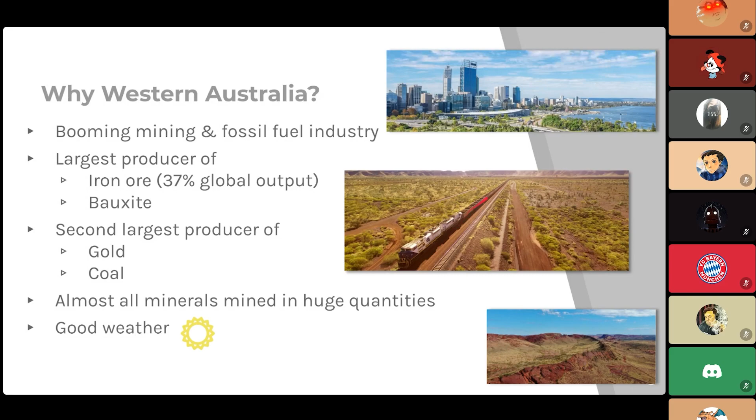So there's a lot of jobs in mining, and also a lot of jobs in the industries that support the mining industry. Here's a picture of a train - this is an iron ore train. It's kind of hard to see, but that train goes all the way off into the distance. Just to give you an idea of how much iron ore is exported, there'll be hundreds of these trains leaving Australia every single day.

So when I got there, I started looking for a job and got really lucky. Within 3 days, I got a job with a company called Falk. They make gearboxes and gears in general. They're probably the biggest gear company in the United States and one of the biggest in the world. They've lost a lot of market share in recent years, but they're still a pretty big player.

Especially in the post-war years, they were hugely influential in gear design. A lot of the gear standards people use globally were written by these guys, so they were pretty influential. In Perth, they had an absolutely tiny office - I was one of 4 people and one of 2 engineers who worked there. I was working as internal sales, and I'll talk about what internal sales is in a little bit. It's a job that's really common for engineers to go into, but it's not very well known.

This here is probably their bread and butter - their standard catalog product, just a gearbox. I'll go into more detail about what these are used for, but to give an idea of size, this one here is probably about 1.8 meters tall. They also do ring gears like this, which can obviously be really big, and this was a big part of their business for a long time.

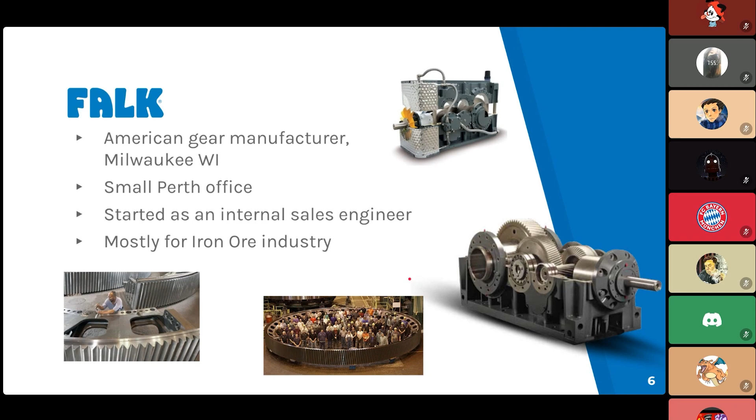So internal sales is a super common job for new grads. In my opinion it's a pretty good one, but it's not very glamorous. Essentially, a customer will come to your company and say, I need a machine that can do X, Y, and Z. An internal salesperson will look through the catalog, find the right product or maybe modify an existing one, then price it up and give the customer a quote. Frequently these internal salespeople are engineers, because you need to do a lot of calculations - some customers have specific specifications that they need you to comply to.

Some applications can be quite weird and unusual, and you need to do some background work to make it work before you can actually hand it off to the design team. So internal sales forms the link between the customer and the engineering design team. The internal sales guy will write the design brief that the design team will use to design the products.

It can be exceptionally technical. You can be doing a lot of math and a lot of hard design in SolidWorks, or it can be incredibly basic, just looking up catalogs and choosing products straight out of there. It kind of depends on the company.

After I did this for Falk, for personal reasons, I had to go back to Ireland, and I got a job with a company here called Prodieco. Ireland's a small country, and for mechanical engineers there's really only two industries: pharmaceuticals and semiconductors. The pharmaceutical industry is absolutely enormous - I can't remember the exact percentage, but I think it's like 30% of Ireland's economy. So if you're a mechanical engineer, you're probably going to work in pharmaceuticals.

This company, they are a tool maker. I'll explain what that is in a bit more detail. A lot of people don't even know that this exists as an industry, but it's super, super important, and there's a lot of job opportunities with tool makers.

This company was kind of small to medium - I think there's maybe about 100, 120 employees, about 30 to 40 engineers. I'm not sure that's exactly right, but it's roughly right. They specialized in tooling for manufacturing blister packs, which are these things here. We've all seen them, you've probably never thought about how they're made, but I spent a huge amount of time thinking about how they're made.

It's an incredibly specific niche, but there's a lot of these little tiny niche companies out there that do kinds of things that you don't expect.

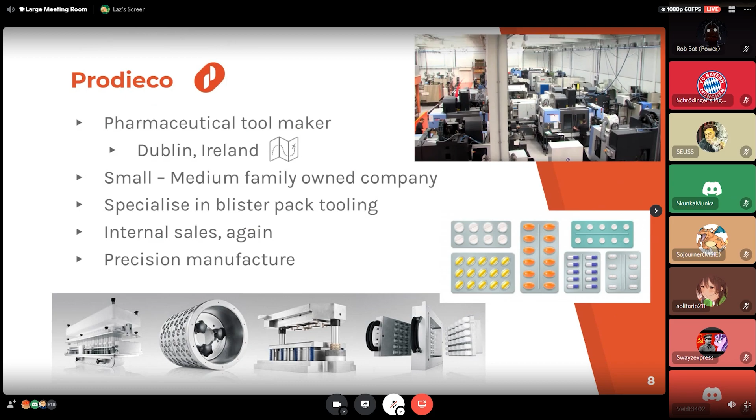I started off there in internal sales again, but as I was in this role, I moved away from sales and more into design, specifically into machine audits and tooling design.

These are the products that they make down at the bottom here. They just kind of look like random machinery components, but these are incredibly precise machines. Any tools need to be made with an absolutely absurd level of precision, which made this pretty challenging and kind of fun job. I quite liked it a lot.

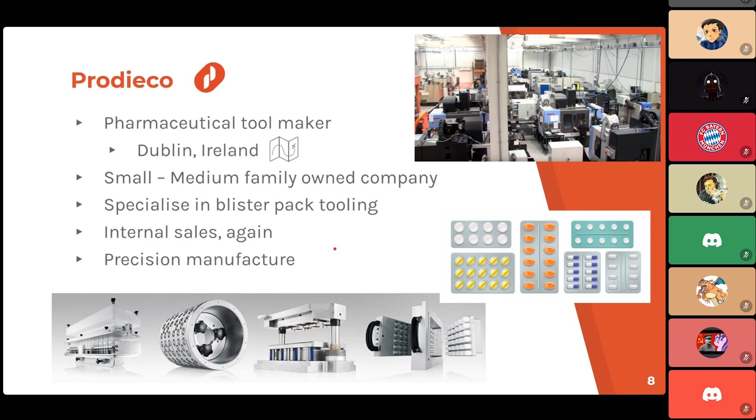So I'll talk about what a tool is and what a tool maker does. When you buy a machine that manufactures something - say something that manufactures glass bottles - the machine itself is capable of doing a lot of different types of glass bottles. If you look at videos of how they're made, and assembly lines in general, you'll see that the machines are making a specific part, but the machine doesn't have to make a specific part. It can make almost anything within that type of product.

The way that you change it to make different things is through the use of tools, and these are examples of tools down here. This one here is just a picture I got off the internet - it just picks up an item and moves it onto another thing. You see it has some little jaws here that grab it, and it picks it up, and it's only able to pick up that one thing.

That's all it can do, it can't do anything else. So they have to be made bespoke for every product that you do. Each tool that you make is custom to that product.

This here is a blister pack machine, a German machine that actually packages pills into blister packs. Inside is a whole bunch of tools that make specific things. In this video, you can see this tool punches out the blister packs from the web, and it's specific to that size of card. It's only able to do that one thing.

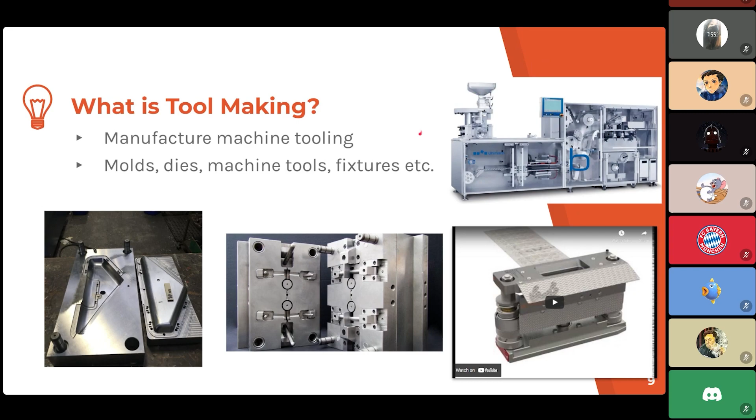This tool here is not that big, maybe 20 to 30 centimeters long, but it would cost about 6,000 to 7,000 euro easily. Then you'd have a whole set of tools all the way down this machine, and a tooling change out could cost anywhere between 20 to 120,000 euro easily.

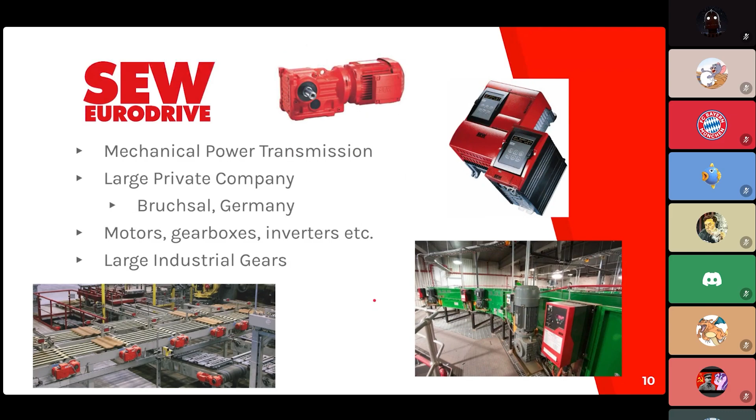My role at SEW is design and support. I'm kind of apart from the design team—there's a core design team in Australia of about 6 to 8 engineers. I sit apart from them and do calculations pretty much all day. I took screen grabs of what my screen looks like on any given day, so you can see what it's like working in design. You've always got Outlook open because emails just don't stop. I've got gear design software, some spreadsheets I made, other random spreadsheets that every engineer makes—you end up with hundreds of these little tiny spreadsheets lying around—and some proprietary software.

This here is a design I was involved with—an apron feeder drive, a type of conveyor, a really big one. This one was 600 kilowatts, which is a lot if you don't know about power ratings. To give an idea of size, from here to here is about the same height as me, about 1.75 meters. The whole thing weighs 16 tons, and with the motor, which isn't there, the whole thing weighs about 25 tons.

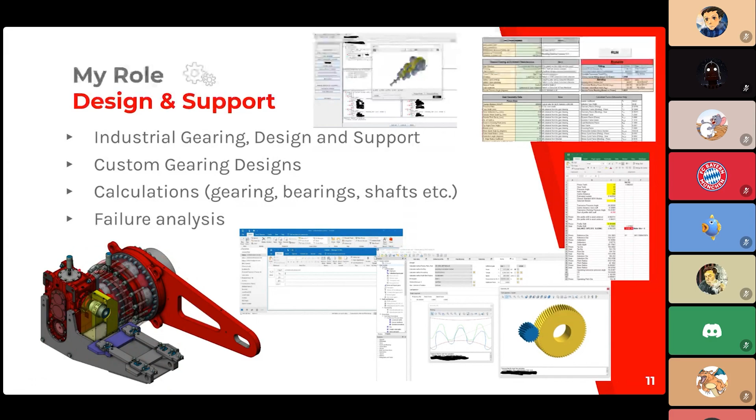So I'll talk a little bit about the industries that we serve. Iron ore is probably our biggest single industry. I don't want to put a percentage on it, but I'd say almost around half of the work that I do involves iron ore.

It's mostly done in this part of Australia, which is super remote. It's about a 2,000 or 3,000 kilometer drive to the nearest city. It's really in the middle of nowhere, and it just looks like this. It's just raw iron everywhere. That's why the dirt is red, because there's so much iron in the soil. There's so much iron in these rocks that they'll actually take a weld. You can weld a signpost directly to a rock in this region.

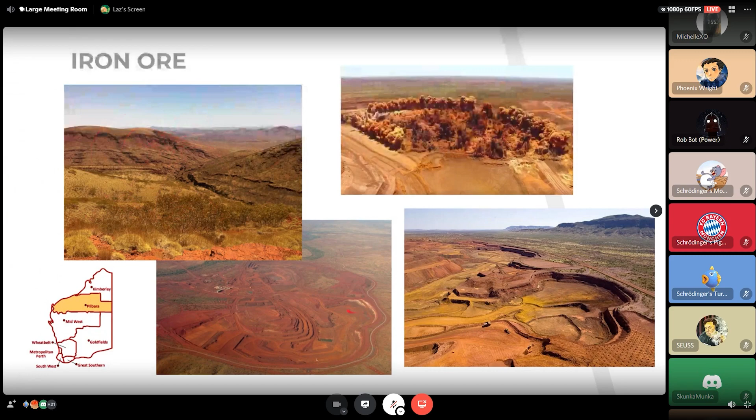This is what iron mines look like from the sky. They just strip mine them out. They don't do any underground mining or anything, they just strip the land bare. This here is a blast. I think this was the biggest blast they did in the last 2 years. That was 11 megatons, so 11 million tons of material blasted out in one go.

So conveyors are probably our bread and butter. This is what I work on probably the most out of anything. Basically they just move material from the pit, where the material comes from, to the train stations, to where it needs to go. They can be really, really long. You can see this one just goes all the way off into the distance, and they can be pretty big. These are ones here that I worked on.

You can see here, this is the gearbox, and this is a 1.25 megawatt, 6,600 volt motor. And mine sites have a lot of conveyors. You can see here, all these, these are just messes of conveyors, just moving materials around.

And they move an almost unbelievable quantity of materials. It's not unusual for a belt to move about 10,000 tons every hour. Iron ore is worth about $200 a ton, so you do the math on that - it's $2 million every hour on every conveyor. It's a lot. The power they use is crazy too. This conveyor here has a total 7.5 megawatt install. To put that into perspective, that's about enough power to supply around 9,000 Australian homes. And that's just the conveyors, let alone the rocks, the crushers, and the other equipment they have.

This was a conveyor drive that I did in Papua New Guinea. This is at a gold mine, which is just in the middle of the jungle. And this was also a pretty big one.

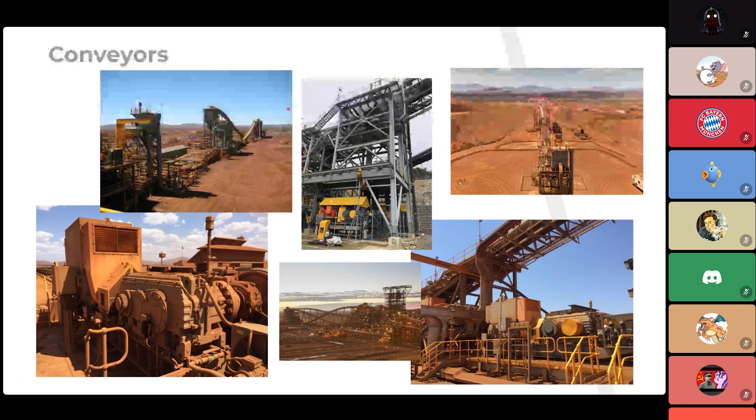Each one of these machines is obviously enormously expensive, and they require quite a lot of gearboxes and motors. It's probably a pretty big part of our business.

They have a big gear on the side of them. That's what this is here, and the whole thing is rotated by driving this gear. They can be pretty big. You see one here, and this was made, I think, in Newcastle in New South Wales.

And they're using a lot of different designs for these types of gears. This is one design that we did, for a cement kiln. So cement comes in here and it gets dried and processed, and this turns it. So this is actually the kiln. They put cement dust inside this, and they just heat it up and rotate it around.

This one is at a beer manufacturing plant, actually, for drying out malt. So the malt just goes in here, and then it's driven by this gear here, and the whole thing just kind of turns around.

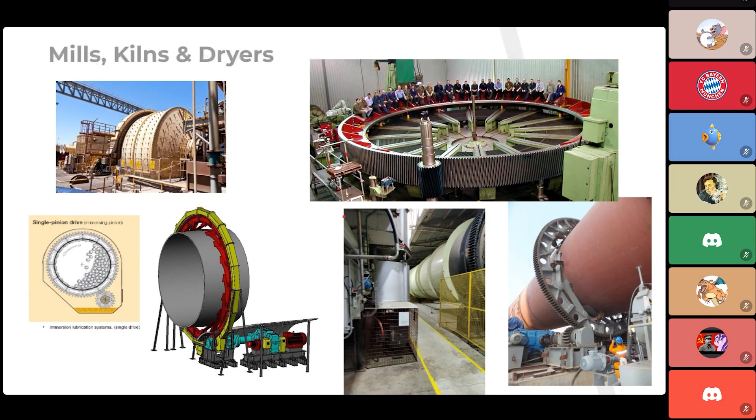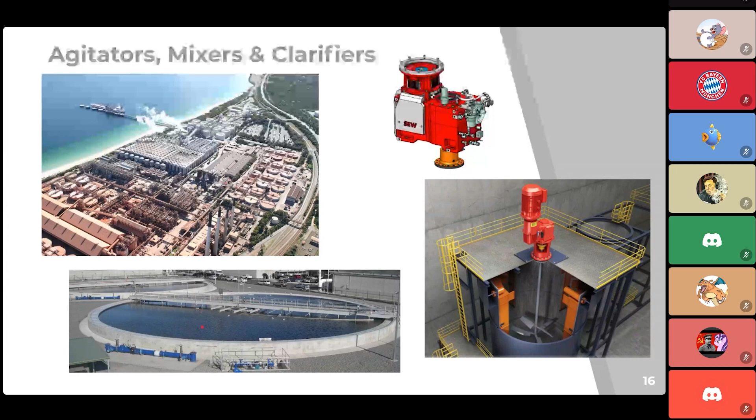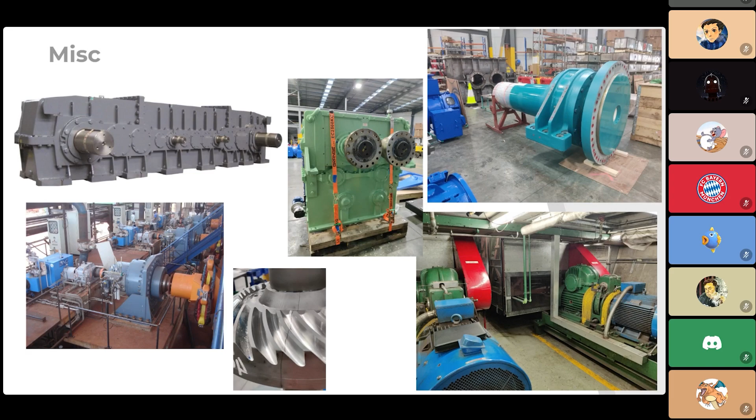Wind turbines are another kind of big business for gearbox manufacturers. They're pretty specialized, pretty high tech, and they require really high tolerances and things. So it's an interesting industry.

This here is a picture. I don't know why I put it there, but I do failure analysis a lot at work. So I'll get something like this in, and someone will ask me, how did it fail? Why did it fail? And how do we stop it from failing? This is probably, I don't know, 20% of my time is spent doing things like that.

I like it, but it can be a frustrating process, because a lot of the time when you get a failure, the failure itself kind of destroys the evidence. So you're left guessing.

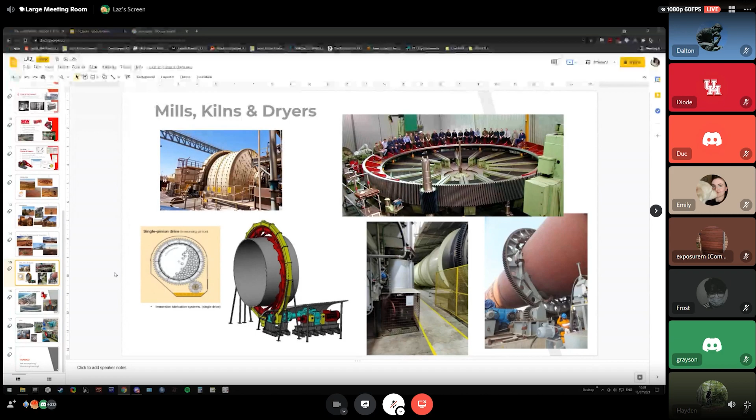Ooh. Probably the one I enjoyed the most - I don't have a picture of it here, but it was working on a conveyor project, and I was involved from the start to the finish. I actually quoted the job in the first place to the customer, and then was involved in design all the way through to completion. I went on site and commissioned these drives too. So from concept all the way to delivery, I was involved in the process the entire way through, and that was really, really satisfying. I really enjoyed that a lot.

That whole process - it was for drives, not these drives, but drives like these ones here. So it probably wasn't the product itself that made it enjoyable, but more the way that the project ended up being executed. It's really satisfying when you do a design to see that in the field, working and moving and stuff.

Would you say that could be a good quality to look for in finding a job? Would it be worth asking an employer, would I regularly be able to see a project from start to finish, such as you've just described? That is an excellent question I'd never considered before, but yes, absolutely.

If you can see the entire product life cycle, you'll learn so much more than you would by just designing things. You could spend a whole career just designing, say, what's the best type of thread for this tiny little bolt, and you'll know a lot about that bolt but not about a lot of other things. But even if you're not fully involved in the whole design process, just being present for the whole life cycle of the project is hugely beneficial.

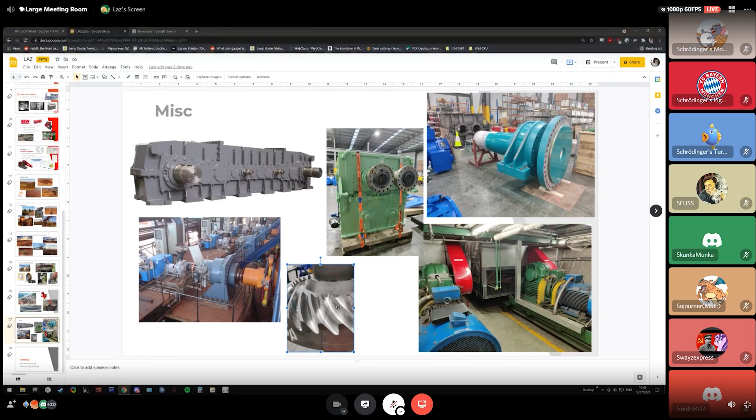So this is a bevel gear, and it had a crack in it. This is bad, obviously you don't want this. It was only - actually it wasn't in service at all - it cracked during testing.

Right now it's at a lab and being destructively tested - they're cutting it open and testing the material for it. Our suspicion is that it was over hardened. These are case hardened gears, so the outside of the gear is way harder than the inside - the outside is like glass, but the inside is like super soft, kind of cast iron. If you harden it too much, it becomes too brittle and it'll start to develop cracks like this. So that's what we think happened, but we don't have conclusive proof yet.

Emily asked, do you do testing of your gears before they go out into the field, or do you only test them when they come back defective or broken?

It depends. Some testing is quite expensive. They're tested during design, obviously—they'll build them up and test them. But when you actually build a gearbox like this, a lot of companies will pay extra for them to be load tested before they go into service. It's pretty expensive, like a load test will cost probably around 15,000 Australian dollars.

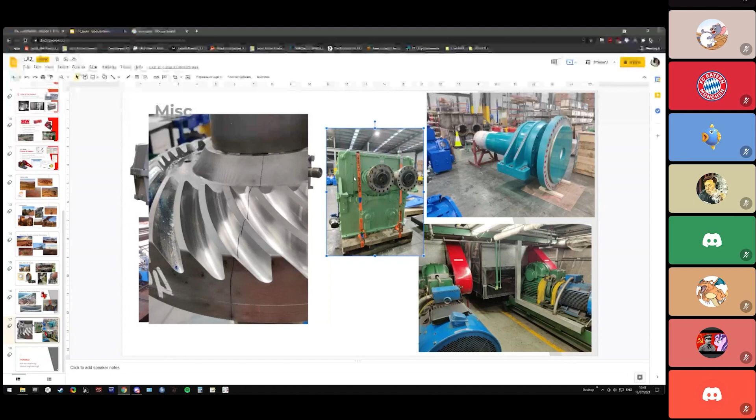So a lot of customers, like the lower end agricultural customers, won't do it, but big mining companies will, because their biggest concern is reliability. If a machine goes down, it's going to cost them $1 million every hour, so they don't want them to go down. So yeah, we test gearboxes complete—we hook them up to motors and drive them as hard as we can to prove that they're fit for service.

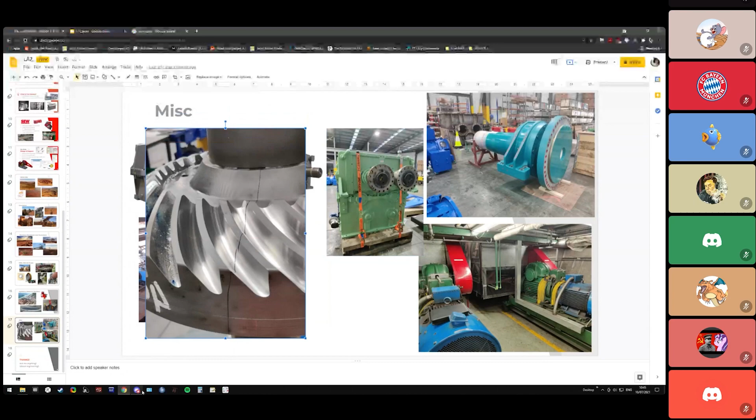Grayson has asked, what aspects of your job do you like the most versus maybe what you dislike the most? And there are some follow-up questions, but we'll start with that one.

Okay, so I really enjoy being given custom problems. It happens a lot where a customer has an application where our standard catalog products won't cut it, and then you kind of have to start designing things from the ground up. I really, really enjoy that particular process. I think it's fun, it can be challenging, it can be a bit frustrating especially if what the customer wants isn't possible—it can get a bit awkward. But it is a process I do enjoy.

I intensely dislike any kind of project management at all, and I do everything I can to avoid it. I really, really don't like it. But because my job is a little bit more senior, I guess—well, senior isn't quite the right word, but more than a design engineer—I do have to go into project management more than I would like, and I don't like it.

I would think project management gives you more opportunities to see the full life cycle of a product. Is there something in particular about project management that you really don't like, or am I just wrong in that regard? No, you're absolutely right, and that's another good point.

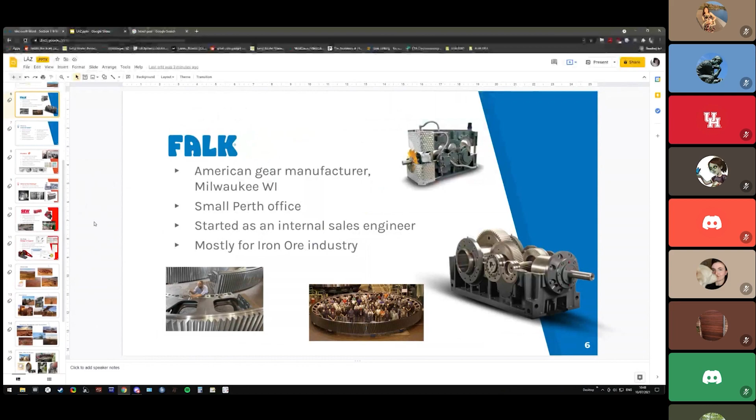I don't really have any long-term plans. Right now I kind of am where I wanted to be 5 years ago. You know that question you get asked, where do you want to be in 5 years? So 5 years ago, I would have said that I wanted to be where I actually am right now. So I'm pretty happy. There's always room to grow, room to move up, and room to make more money.

But for right now, I'm pretty happy where I am, no real long-term plans to move. The employer that I work for right now is, I think, the best employer for me that's available in Australia. So I'm just taking it one day at a time, I guess.

Well, that sounds wonderful. I think we're all very happy for you and glad to hear that. I know that we can all only hope to one day feel that way. So maybe not specifically in Australia. It sounds nice otherwise.

Skunka Munka asks, what's the demand for electrical engineers in the Australian iron ore industry? I know the iron ore companies use autonomous vehicles. What other electrification is imbued in the process? Maybe you could talk about any coworkers you might deal with.

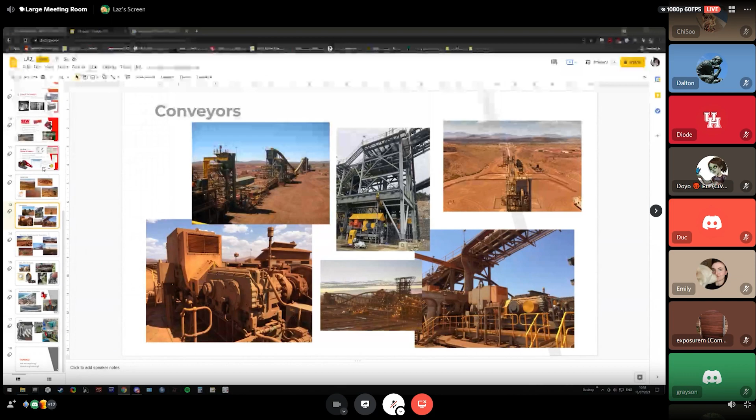Grayson asked, have you found the design process in your industry to be sort of algorithmic or very diverse based on each project? I think you mentioned you had your own spreadsheets earlier. Would you say you're able to reuse a lot of those spreadsheets? Do you find the tools in your proprietary software to be repetitive at times, or is everything an adventure for you?

Well, it's a good question. I'm not really sure how to answer it. Gears are an old technology, they've been around for a long, long time, and they've kind of been optimized to death, right? They're finished essentially, the theory behind them is done, the books have been written. There's not really a lot of room for innovation. I mean, there is innovation, don't get me wrong, but you're talking about getting 0.5% more performance or more lifetime out of a gear. We're down to that sort of scale of things.

So yeah, it is quite repetitive. You will do the same calculations all day, every day, the same ones. But that doesn't mean it's not satisfying. Each specific problem will have its own challenge that's unique to that job, even though the calculations themselves are the same. So while your workflow might be quite similar, you do get a quite diverse workflow, even though the specifics are very similar. I hope that answers it all right.

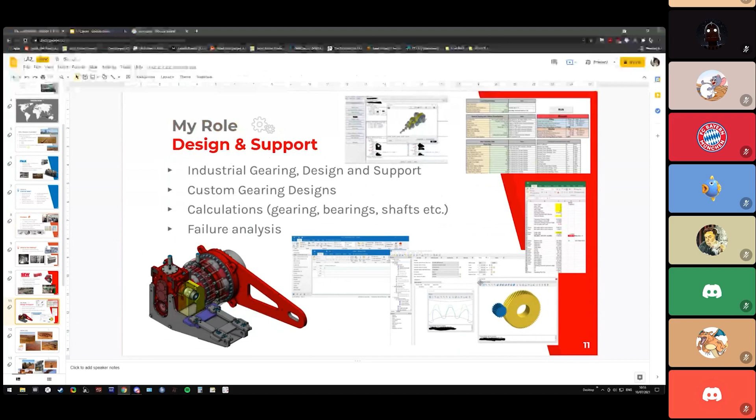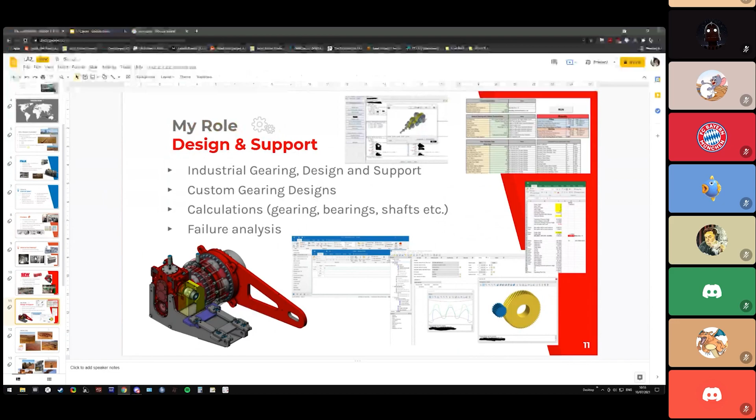So yeah, I don't think one is more enjoyable or harder than the other, but I do have a preference, which is for gears, though I also enjoyed my time learning about how tools are made.

We have a question from Veidt, who says: I am a chemical engineering student from South America. Would it be possible for me to get an entry-level job somewhere in Australia, or should I aim to get experience in my country before applying to overseas jobs? I know you started by talking about how you basically moved straight to Australia to find work, but those were certainly different circumstances. Do you think something like that could still happen today?

Yeah, it could. I'll clarify a point though: what I did was stupid, and I wouldn't advise anyone else to do it. It's not a great idea. I did it out of desperation, there was nothing in Ireland. I went to Australia thinking maybe I'll get a job, and if I don't, I'll just have a nice holiday and go home. That was my thinking behind it.

In terms of specifically chemical engineering, there are chemical engineering jobs in Australia, but they can be very competitive. There are more chemical engineers than there are jobs. If you work in chemical engineering, you're probably going to be working for the gold or the aluminium industry.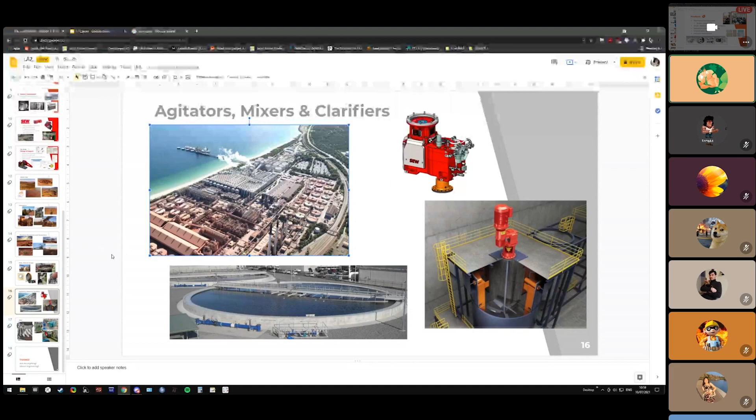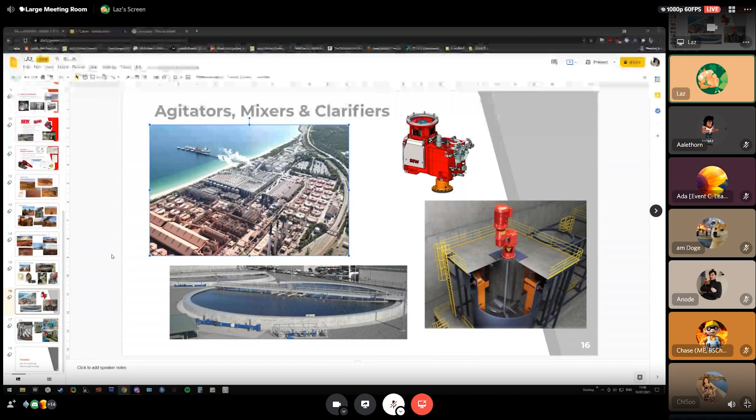Yes, you do. I tend to avoid large companies where I can, I don't like working for them. SEW is an enormous company, globally there's about 17,000 employees, and in Australia they have around 300 or so. My department is around 50-ish. The departments are quite separated, so I'll almost never speak to anyone in the electrical department, it's very rare. So in that sense it feels like a small company, even though it's not, and that suits me.

This company here, Prodieco, even though they were a family-owned, smallish company, they had a lot of designers. They had a whole floor, maybe 30 or 40 designers all sitting at cubicles, designing all the live long day. You do start to feel lost, and you can feel devalued. It can be hard to move up, and you might feel like you're being ignored, especially for people who aren't very social.

Some people don't like to talk a lot, they just kind of go to their desk and quietly do the work. I found that in many companies, those types of people in large companies tend to get ignored, and they get passed over for promotions or opportunities simply because they're not good at making themselves heard, and they get lost in the crowd. So for those types of people, I would definitely recommend smaller companies.

In smaller companies too, it's not a general rule, but they can pay worse. They can be a bit more stingy because for them $1,000 is a lot of money, but for like Raytheon, $1,000 is pocket change. So you can be nickel and dimed a lot in smaller companies, but none of those rules are really 100% true all the time. It's kind of down to preference. You'll just see it as you get into industry, you'll know what you prefer. You'll naturally gravitate towards the type of business that you prefer.

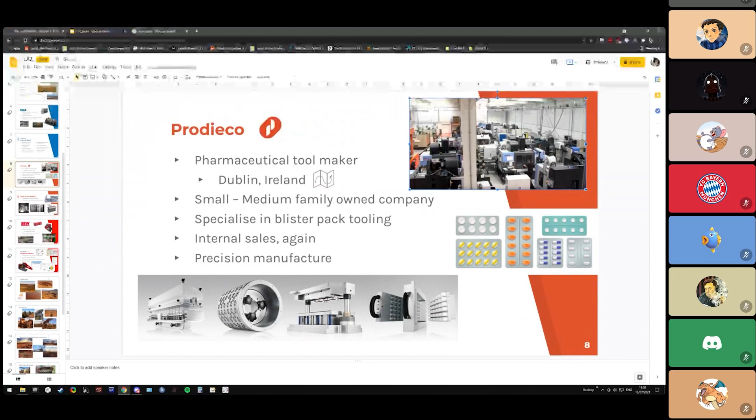So if you're coming out of university and you're wondering, should I work for a small company, should I work for a big company, I wouldn't worry about it too much. Just get a job, and then you'll learn what's good for you and what's not.